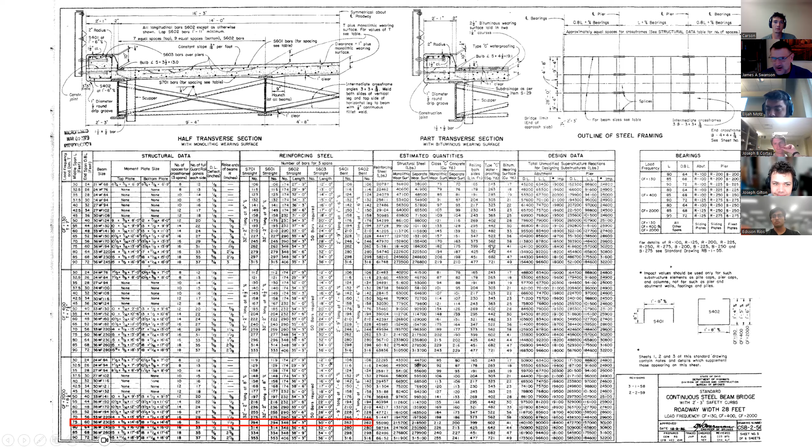So yeah. And probably if I were to name it again now, in order to be PC, I would probably avoid the word, the I word. But I'm going to go ahead and ride that train until it crashes.

So if you look at the upper right part of that drawing, this is a typical structural layout. So each of these bridges has 4 girders. They have 2 intermediate piers. So here's an intermediate pier. I guess I could draw on this. Here's an intermediate pier right here. Here's an intermediate pier right here. This is an abutment, and this is an abutment as well. In this context, we could refer to it as the left abutment and the right abutment.

But typically what you would do is you would stand at the west end of the bridge and look east, or you would stand at the south end of the bridge and look north. And in that case, the abutment that you're standing on is the rear abutment, and the abutment at the opposite end of the bridge would be the forward abutment. Maybe a little bit more bridge knowledge than you really need.

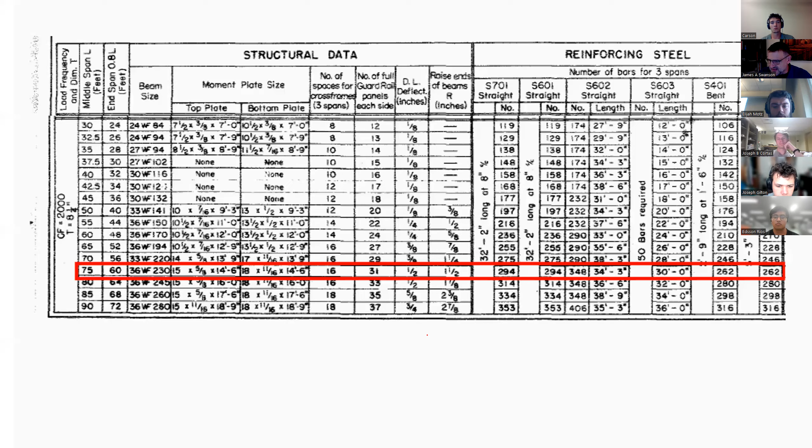If we go and take a look at some of these dimensions, we have span lengths up here that we need to know. We have girder spacings that we need to know. Those are all called out in that table. So if we zoom in there, we're going to have a middle span of 75 feet, 2 end spans of 60 feet. It's going to be a 36 wide flange 230, which is slightly different than a W36x230. That's an old version of the manual. That's not really germane to this conversation. I keep diving in too deep into the details.

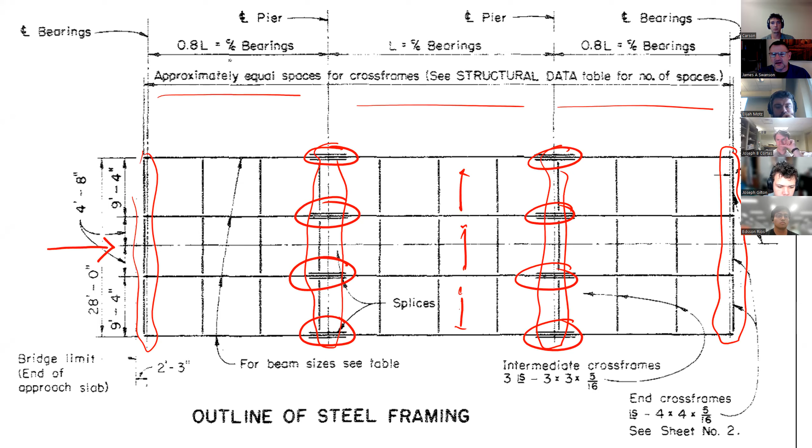One other thing that's noteworthy here is that there are moment plates, and those are reinforcing plates for the girders where the moment is the heaviest. So the moment tends to be heaviest over the piers in the negative moment region. So in order to reinforce the girder, we put in, we call them cover plates nowadays; they called them moment plates back then. And then you see the number of cross frames, et cetera. So this gives us all the details that we would need for our bridge.

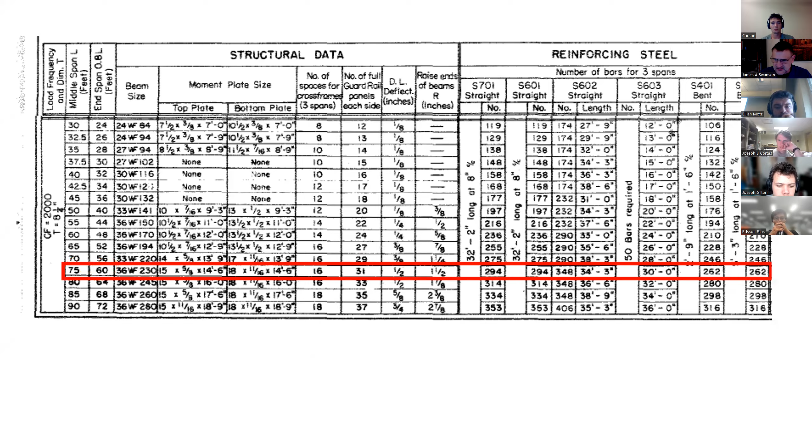So if we look at a cross section, this is a half section. So this is a line of symmetry here. So you can see how this is all spaced out. So what we have is girder 1, girder 2, girder 3 would be over here, then girder 4. And so what we're going to do is we're basically going to model one girder in this bridge, and then we're going to subject the loads for the bridge onto that one girder.

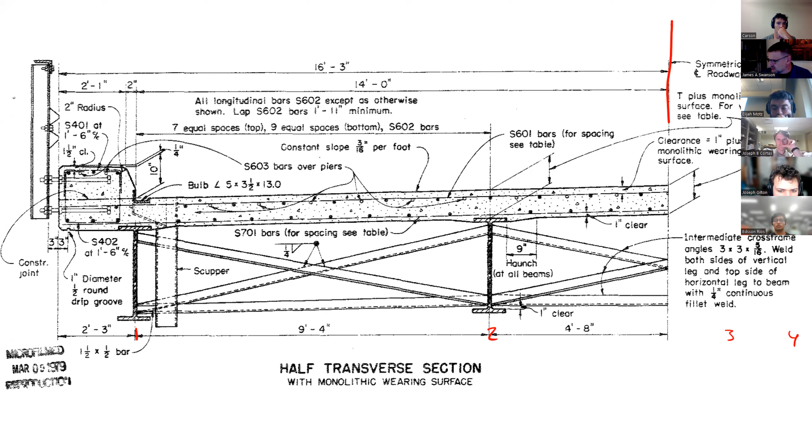Now this drawing here is only a half section of the bridge, and it's really busy with all the callouts and the language. So what I'll do is I'll go here and say, let's use this. I know the guardrails are different, but I had this already drawn to save me some time. So let's use this as an example.

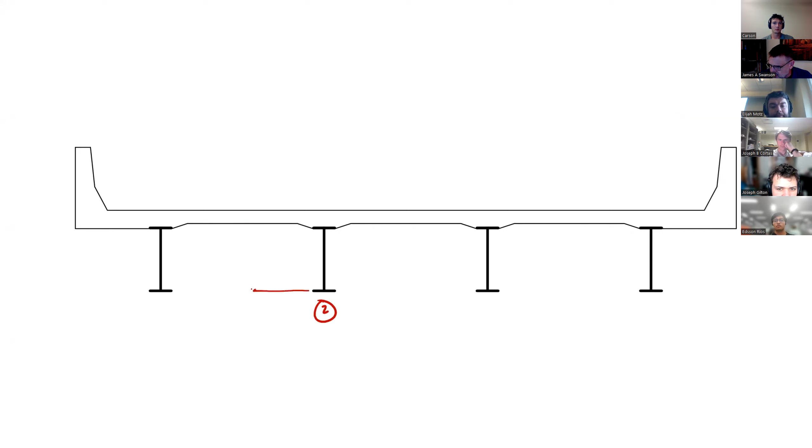So when we put loads on this thing, what we end up doing most of the time is we take a tributary width for all of the gravity loads. So if we're going to model girder number 2, what we would do is take a tributary width that goes halfway to the girder to the left, a tributary width that goes halfway to the girder to the right, and we would include the self-weight of that steel girder plus the self-weight of the concrete that's within that tributary width. That's probably common knowledge to everybody in this room.

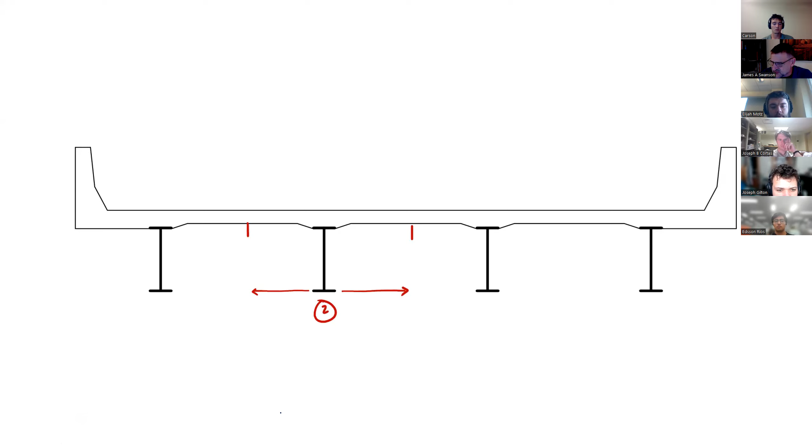What's probably not common is how we apply the lane loads or the truck loads on this bridge. So what we would do in bridge engineering is we would say, all right, all my lanes are 12 feet wide. So the lanes look like that. I might have lane 1 here, a lane 2 here, and a lane 3 here. And then you say, all right, I've got my highway truck. It's an HS20 or an HL93 or whatever truck you're designing for. I'm going to put this truck over here in this lane as close to that girder as I can get it.

I'm going to put this truck over here in this lane as close to that as I can get it. And so what we end up doing is we take a truck load that looks like this with 3 axles. We spin it sideways and we come up with something that's called a distribution factor.

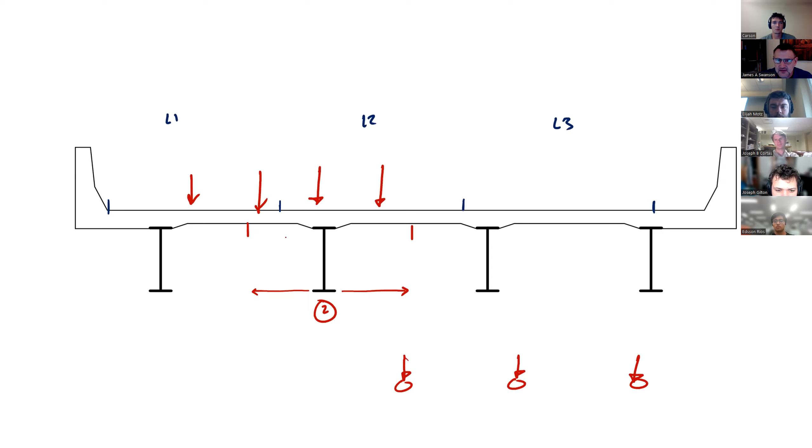And so the distribution factor in the context of bridge engineering is equal to the number of lanes worth of loading that go on a girder. And so I'm showing 2 lanes worth of loading here, loading from lane 1, loading from lane 2, but part of that load is carried by girder 1, part of that load is carried by girder 2, and some of it is carried by girder 3.

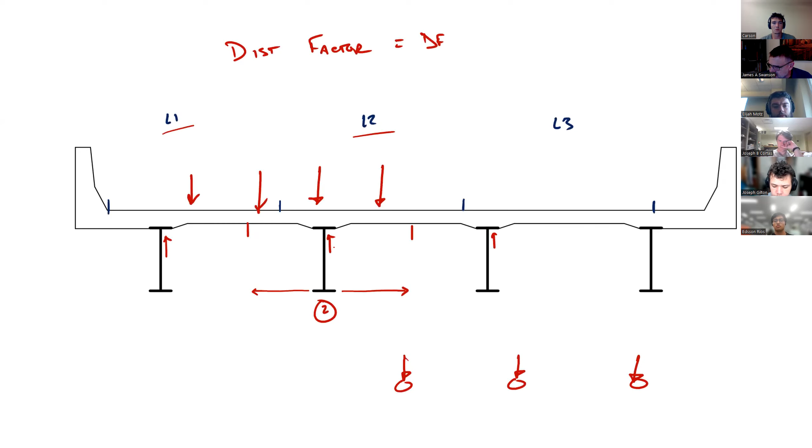So what we can do is go through an analysis, and we might say that the reaction force on the deck due to girder 2 is equal to 80% of 1 lane's worth of loading. And so we use that distribution factor when we apply the live load. So with that being said, let's go ahead and start modeling one of these girders.

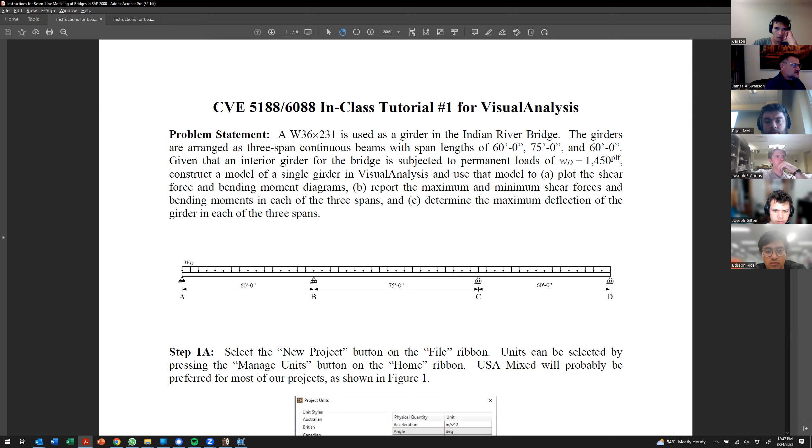Right, so fairly common problem. This particular one doesn't have any live loads in it, but then there's a second one that I'll post when we get there that we'll go back and model some live loads. All right, it occurs to me that I haven't finished the introductory modeling presentation, so I should probably do that. Let me go ahead and launch that, and since I'm working over here, I'll just launch it over here.

That's M1, right? And I'll move that over there, hit F5. Nope, let me hit Shift F5.

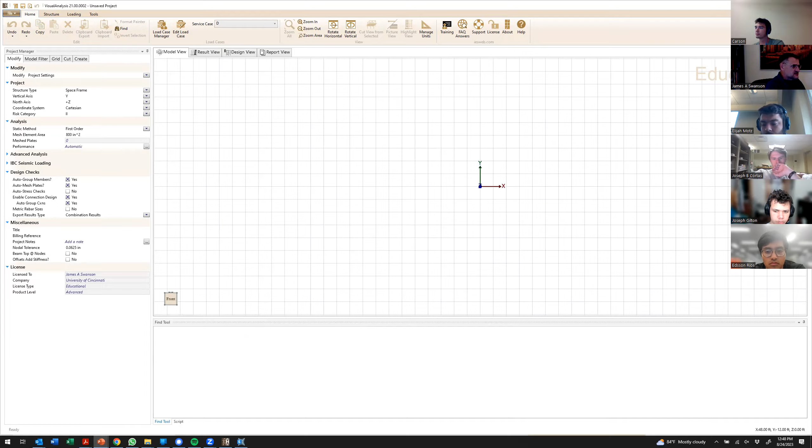But I use this as an example when we start doing the matrix analysis. And as a first problem, it's a big problem. So you get a matrix that is 10 by 10 that you have to invert. And anyways, the basic approach that we use for modeling these structures is that we replace each of the physical members in the structure with a line object or an element, and each of those objects or elements is connected to each other using a node.

Now, the terminology here gets a little bit cumbersome. I'm using the word object, I'm using the word element. In a lot of cases, those two things are synonymous with each other, but in some cases they are not. SAP 2000, for example, distinguishes between an object and an element. The word node, the word joint, those are usually synonymous in all cases.

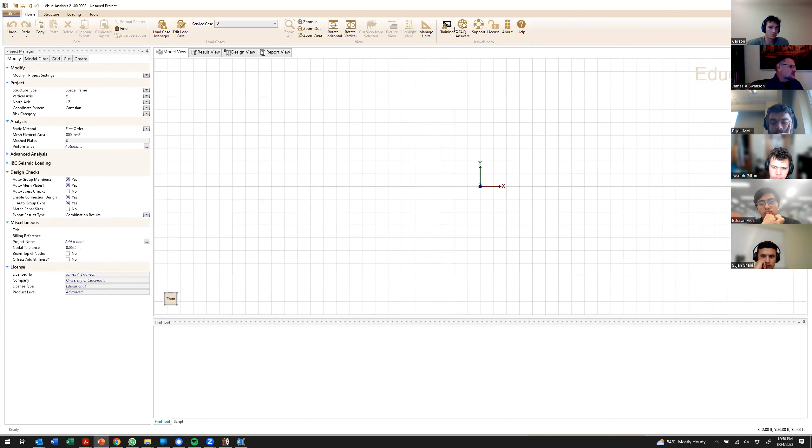So I'm actually going to switch back to the other computer. I want to be able to sketch on this, and in order to do that, I need to be on the other computer. I apologize for the discontinuity here, but I think it'll make it better overall. Let's go back. I want to share that screen. There we go.

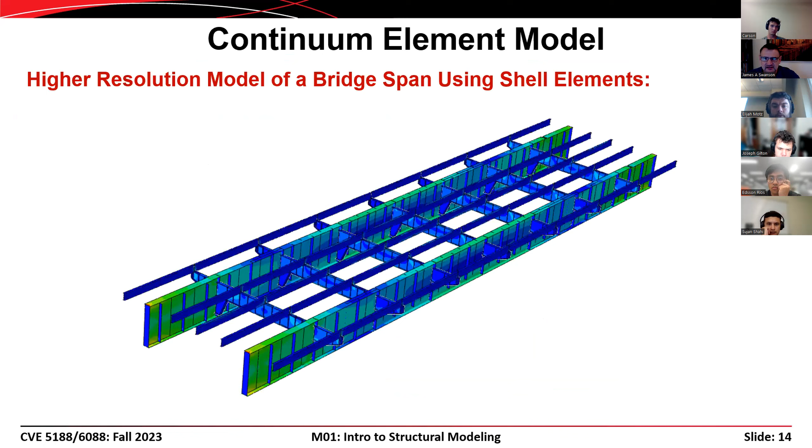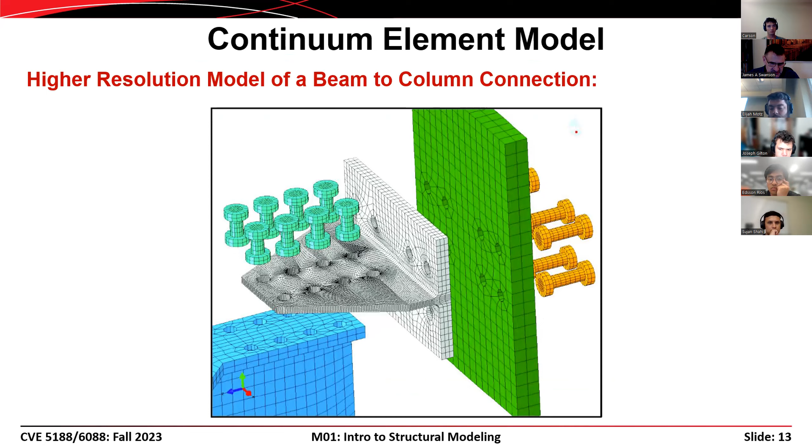If you went to Dr. Rosati and asked him what his distinction was, he'd probably give you something similar, but maybe a little bit different. All right, so here are the rules again. Every node has degrees of freedom that define motion as well. So what is a degree of freedom? Basically, a degree of freedom is an expected motion associated with an object.

And so the motion that we deal with is either a translation, a delta x, a delta y, a delta z, or it's a rotation, a theta x, a theta y, or a theta z. So depending on what type of structure we're modeling, we have different degrees of freedom associated with each of the nodes in our model. So if we were modeling a two-dimensional truss in the xy plane, the degrees of freedom at each node would be displacements in the x direction and in the y direction. We would have a delta x and a delta y at each one of the nodes.

And so since this is probably modeled as a truss, let's go back here and draw in those degrees of freedom. So let me use blue for that.

I don't know why, I just always use blue.

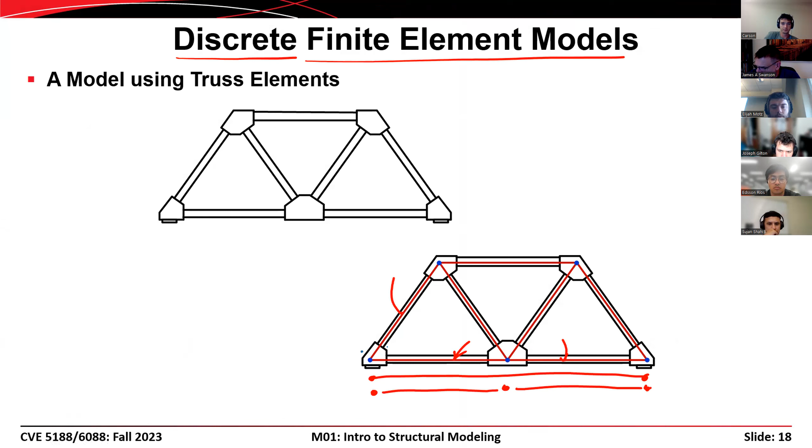So this would be delta x, this would be delta y, so that node would have 2 degrees of freedom. Up here we would have delta x, back here we would have delta y. And so at each of these 5 nodes, we would have 2 degrees of freedom. So we would have a total of 10 degrees of freedom for this small truss. Like that and like that.

Now, we don't worry about rotational degrees of freedom in a truss because the assumption in a truss is that every member is pinned to the node. And so if the member is pinned at the node, then the node isn't going to rotate at all. It's free of rotation. So there's only 2 degrees of freedom, displacement x, displacement y.

All right, now let me go back to the slide at hand. That's actually a touch screen. That'll save me half a second.

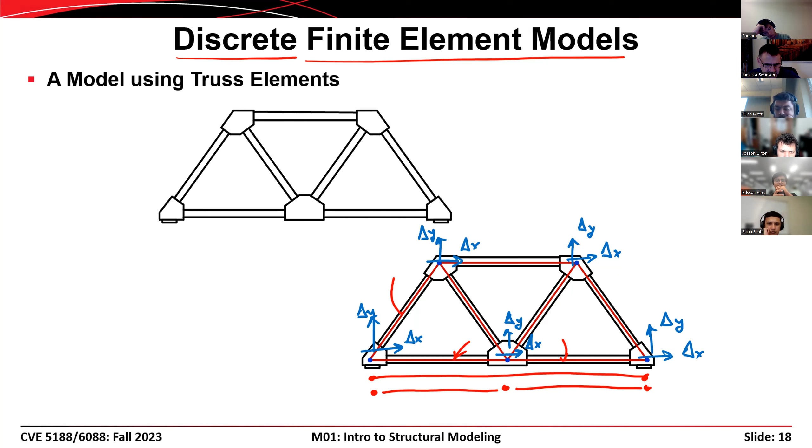There we go. So if we look at a 2D frame in the XY plane, then we retain the two displacements, delta x, delta y, but we also add a rotation about an axis that's parallel to the z-axis. So we have 3 degrees of freedom in every node. We have delta x, delta y, and theta z. If we look at a 3-dimensional truss, then we have 3 displacement degrees of freedom, delta x, delta y, delta z. And if we look at a 3D frame, we have 3 displacements and 3 rotations. We end up with delta x, delta y, delta z, theta x, theta y, and theta z.

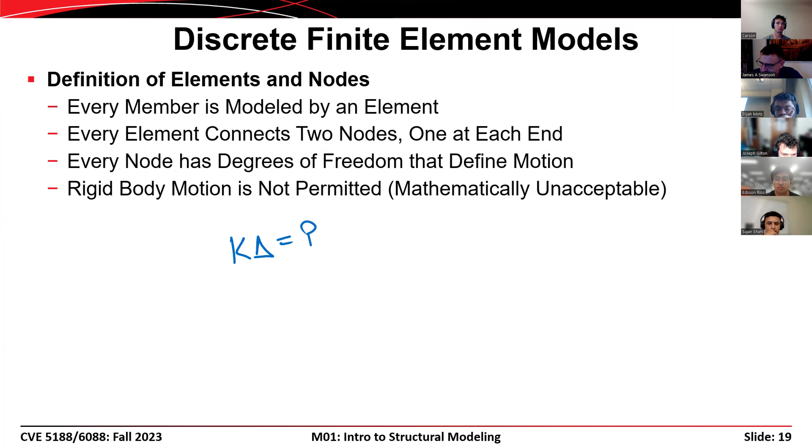So it works out that when we construct a model of a structure like this, we're actually solving a problem that looks like this. We have a stiffness matrix multiplied by a displacement matrix that is equal to the loads. It's like a spring problem in physics, right? You have a spring stiffness K, you have some displacement, and then you have the resulting force in the spring. Except in this case, it's presented in a matrix format instead. So you have a matrix K, you have a vector of displacements, and you have a vector of loads like that.

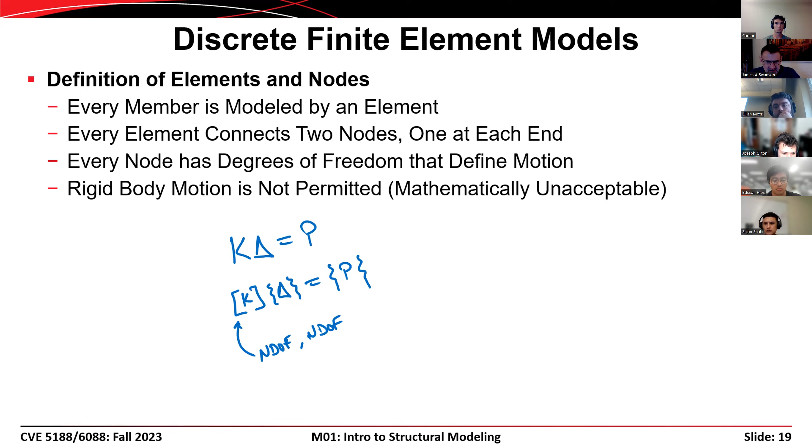And so the size of that matrix K is the number of degrees of freedom by the number of degrees of freedom. So if you take that truss with 5 nodes, each node has 2 degrees of freedom, you end up with a stiffness matrix that's 10 by 10. It has 100 elements in it. Some of those elements are going to be 0. In fact, a lot of the elements are going to be 0, but it's still a 10 by 10 matrix. So you can see that when we present a small problem, it gets rather large mathematically rather quickly. Anyways, so that's in the context of a 2D truss, a 2D frame, a 3D truss, and a 3D frame.

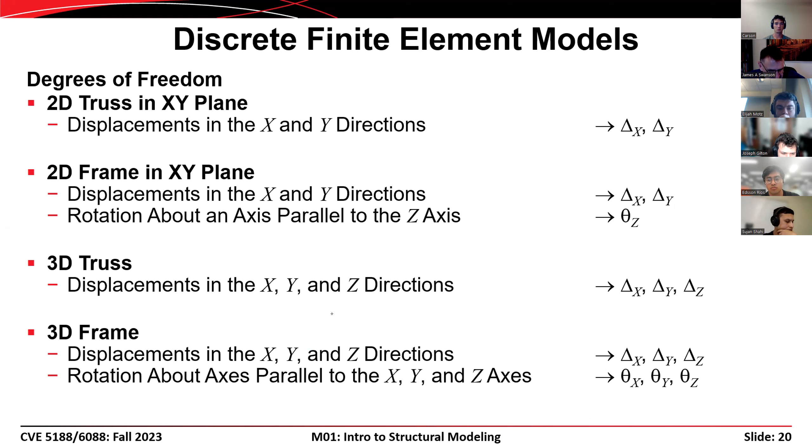So one of the things that is interesting, let's see, I want to see where I'm at here. So when we look at those degrees of freedom, we're going to be looking at, say, for a 2-dimensional frame, I typically draw the nodes as boxes when it's a frame. And the reason why, so if we have a truss, I'll draw the node as a circle like that.

If I have, let me make that a little bit bigger, I guess, since you guys might be, is anybody actually working on their phone? Probably not. So then there's a box.

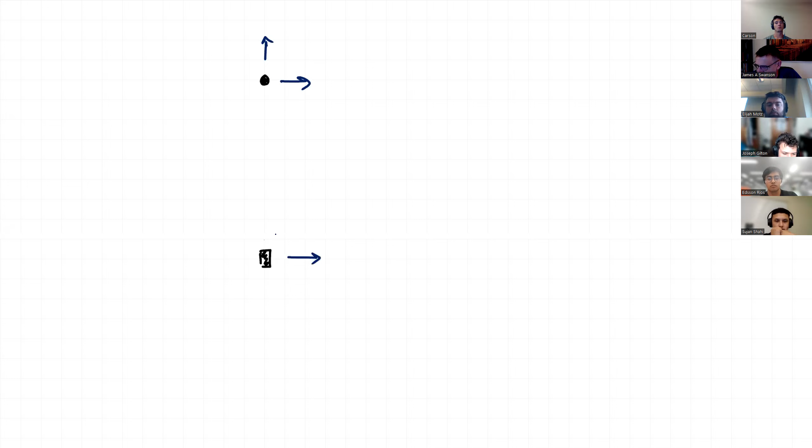If it's a truss, I usually draw the node as a circle. If it's a frame, I draw the node as a box. And the reason why is that when we go in and look at the truss, we're only looking at displacements in 2 directions. When we're looking at the frame, we're looking at a rotation as well.

And that box is meant to imply that there is a rotational degree of freedom there, because you can see a box when it spins, but if it's a dot, you can't tell when it spins because it has no corners, right? So in this case, we would have a delta x, we would have a delta y, and a theta z. I call it theta z. It's theta about an axis parallel to the z-axis, right?

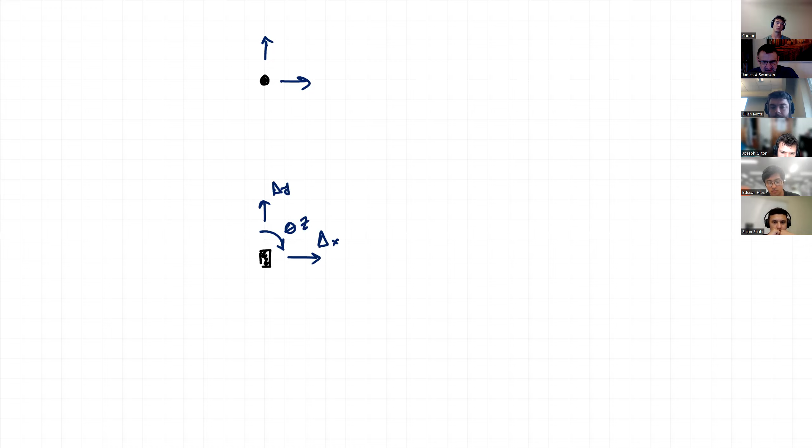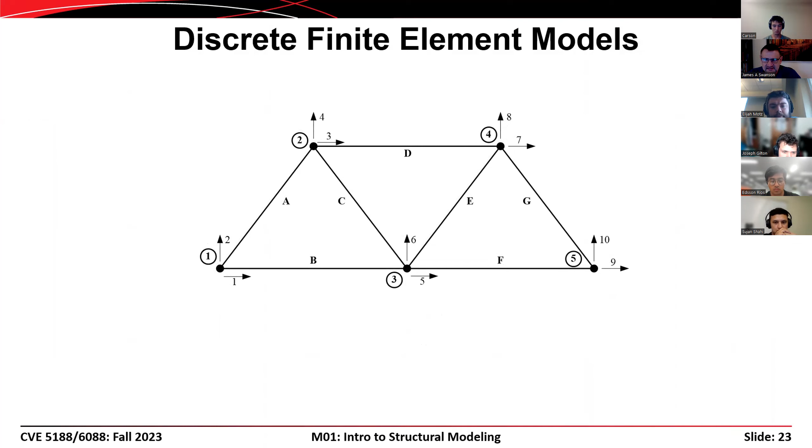And the numbering sequence that I use is rather anal retentive, but it makes a lot of sense, especially if you're one of the few people on Earth that likes to write code. Then this will make a lot of sense to you. So we have the ith node number, and we could define the degree of freedom based on the node number. So if we go in here, for example, and we look at node number 2, we could say that delta x at node number 2, that degree of freedom is equal to 2 times the node number 2 minus 1, so that's equal to the 3rd degree of freedom.

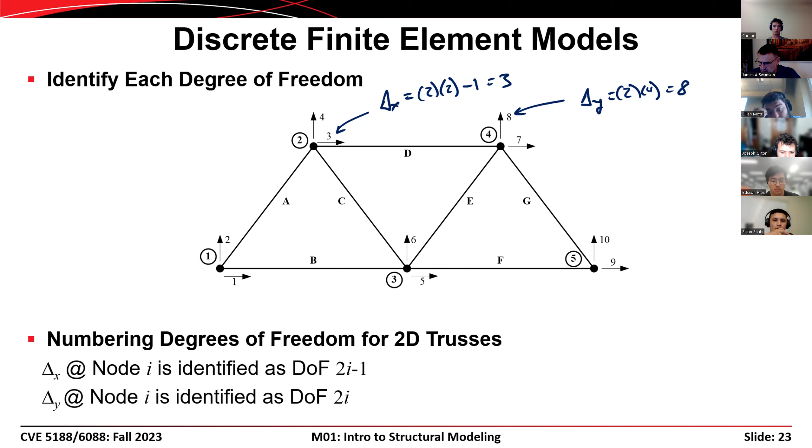If we go in and look at delta y at node number 4, for example, then delta y has a degree of freedom of 2 times the node number, that's 4, and then that's equal to 8. So that's the 8th degree of freedom. So you could go through here and you could say any degree of freedom that has an odd number is going to be a displacement in the x direction. Any degree of freedom that is an even number is going to be a displacement in the y direction.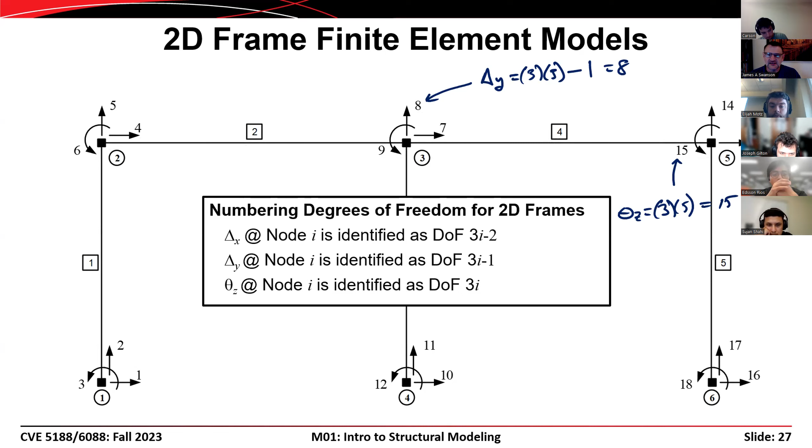So one of the first homework problems is for you to go into a truss and identify the degrees of freedom, and then calculate some of the connectivity of the members in that truss, and then calculate some directional cosines. And it might not be obvious now why we're doing that, but kind of like Mr. Miyagi telling Daniel-san to go wax the car, eventually you'll see the utility of calculating directional cosines and connectivity.

Now, one thing that bears mentioning at this point is that when we go into Visual Analysis and SAP 2000, the coordinate systems that they use as a default are different from each other. Visual Analysis assumes that the XZ plane is the plane of the Earth, and the Y axis is vertical. So the Y axis is the gravity axis. So when it applies gravity loads by default, they're applied in the negative Y direction.

SAP 2000 makes a different assumption. It assumes that the XY plane is in the plane of the Earth, and that the Z axis is perpendicular to that. So when it applies gravity loads, those gravity loads are in the negative Z direction.

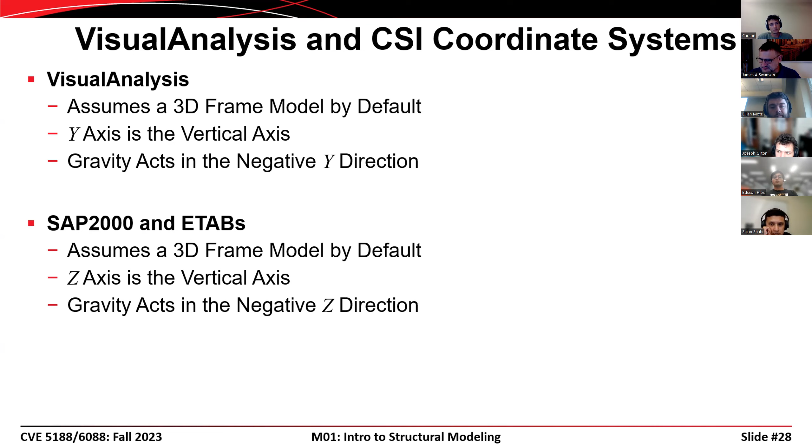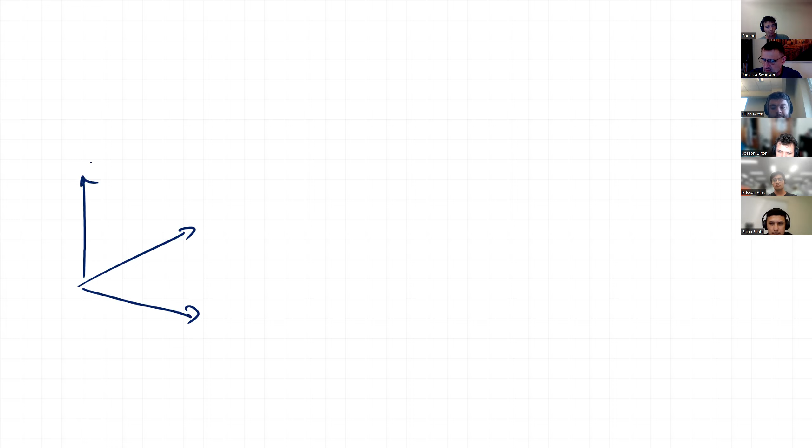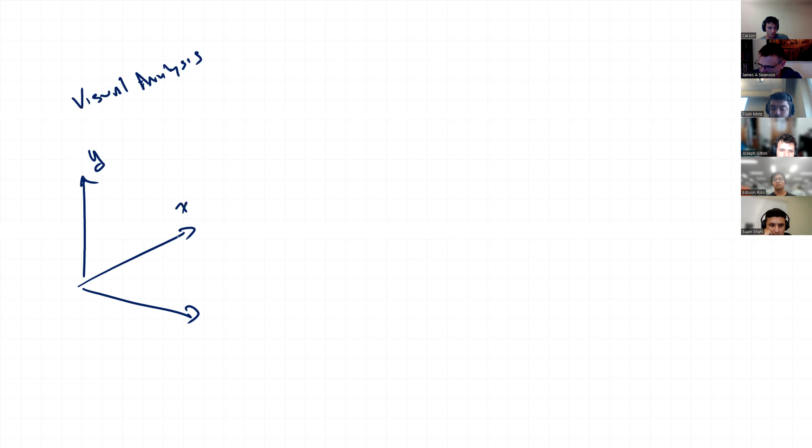So if we come over here and do a little bit of sketching, that would make this a sketchy chart. This is going to be the Y-axis for Visual Analysis, like this. And so if that's the Y-axis, then this is the X-axis, and that's the Z-axis, and that gives us a right-hand coordinate system. So when we do the same thing for SAP 2000, we have the X-axis defined here, the Y-axis defined there, and the Z-axis defined there.

So when we go in and apply a gravity load, that gravity load is applied in the negative Y direction for Visual Analysis, and it's applied in the negative Z direction for SAP 2000.

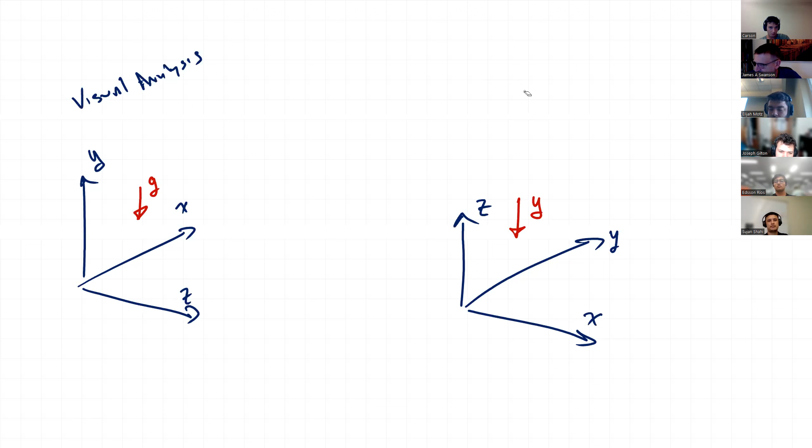Whoops, that's the wrong shade of blue. That's unacceptable. There, and that's much better.

Okay. And so when we do a two-dimensional model within the three-dimensional space, a lot of times we'll work in the XZ plane for SAP 2000, and by default we're going to work in the XY plane for Visual Analysis. And so that's a little clunky. It creates a lot of confusion. So by calling it out here, you know what to expect. Now that you know what to expect, hopefully you guys will all make fewer mistakes. You're going to make mistakes. I still screw that up from time to time.

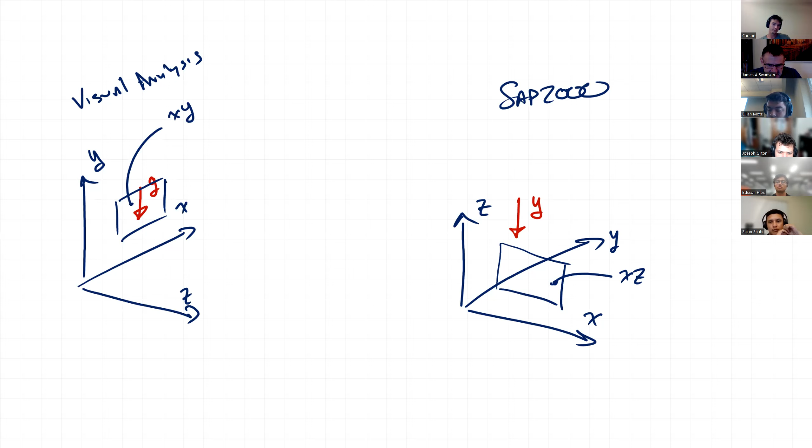All right, so the next topic on this presentation is the distinction between restraints, constraints, and releases. These are three different things that occur in models with regularity. And these terms are very specific and very important. There's a lot of things that I say that mean the same thing, like a node and a joint, those are kind of the same thing. For a lot of cases, an object and an element are the same thing.

But if you say restraint and you mean release, that means two very different things. If you say constraint and you mean restraint, that means two very different things. So I want to define them up front, and then I'll reinforce that as we go through the course. So a joint restraint creates a relationship between some degree of freedom and an absolute reference frame. Now that sounds very analytical, but let me illustrate that by going back here. So if we look at the nodes at the bottom of this, these are going to be nodes that have restraints.

So if we come in here and look at nodes 1, 4, and 6, and we look at the degrees of freedom, that means that node number 1, degree of freedom number 1 is going to be restrained, degree of freedom number 2 is going to be restrained, and degree of freedom number 3 is going to be restrained. Over here, degree of freedom 10, degree of freedom 11, those are both restrained, but degree of freedom 12 is not. At the right, degree of freedom 16, 17, and 18 are all restrained.

Now, when I use the mathematical definition and say it's a relationship between a degree of freedom and an absolute reference frame, that absolute reference frame is that those degrees of freedom are equal to 0, right? We're saying that that node is fixed. It's not going to move. So we know delta x at node number 1 is equal to 0. Thus, delta 1 is equal to 0, delta 2 is equal to 0, theta 3 is equal to 0. So it's very specific. It creates a relationship between the node and an absolute something, all right? Okay, let's go back to that definition.

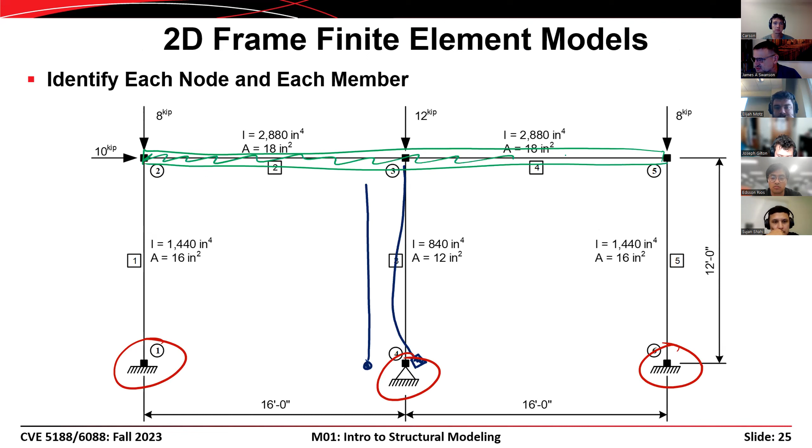Go here. And so one of the common things that we would do in our models is we would come in and say that, boy, I wish I had gray. I don't have gray. I'll use green. There's probably a floor slab up here on this level, or maybe it's a roof slab. So we would probably model that as a rigid diaphragm. And what that means is that if it's concrete, it's so stiff that when this thing moves left and right, all three of these nodes are going to move by the same amount to the left and to the right.

It's a diaphragm action. Not everybody knows what that means, but what we would do in our model, if we want to capture that, is we would say, let's go ahead and put a diaphragm constraint into this. Diaphragm, it's got a goofy spelling, and that would be a constraint. So what we would do is come in and say, all right, I want the displacement in the x direction at that node to be equal to the x displacement at that node and equal to the x displacement at that node.

And if we go to the next slide, then what that would say is that delta 4 is going to be equal to delta 7, and that's going to be equal to delta 13. And that is a constraint. So what we're doing is we're defining relationships between degrees of freedom at different nodes. Okay. There are other constraints. That's a rather advanced topic, especially when you go to implement it in the matrix operations. It's very useful in building type structures. It's useful in bridges too. It makes the problem smaller. It makes it quicker to solve. It also gives us results that are more typical of what we would expect from a hand analysis. And so it's very useful

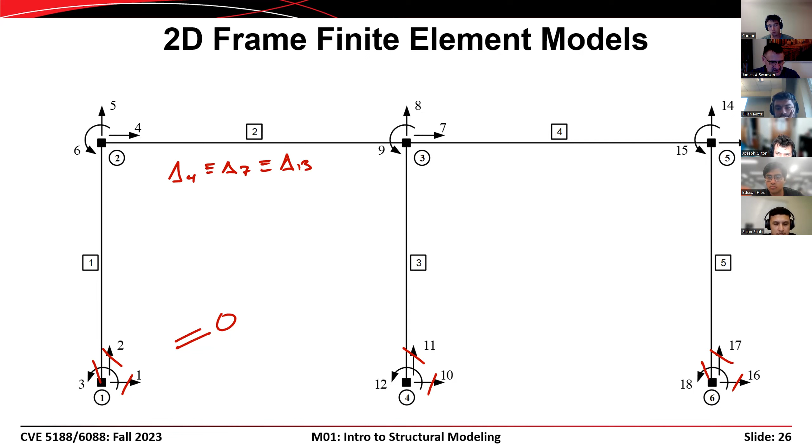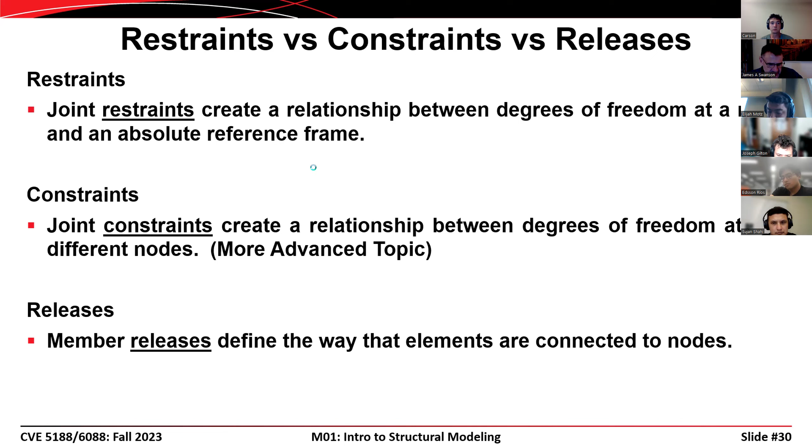So, right. Then the last thing that we'll talk about is a release. A member release is something that's added to define the way an element is connected to a node. And so when we go back to this, for example, maybe we would want to have one of these beams pinned at its end instead of connected rigidly. So in that case, you would come in with the purple marker and put a pin in there. And that pin, the word that we use to describe that is a release.

We're releasing the connectivity between the moment at the right end of that member and the node that it's attached to. Or we would be releasing the moment connectivity between the top end of that column and the element that it's connected to as well. And so those three terms are important. We use them a lot, but we have to be careful when we use them, because if you say the wrong thing, then you get the wrong answer from your professor, and then nobody's happy, right?

I've wasted my time describing the answer to the wrong question, and you're back to square one.

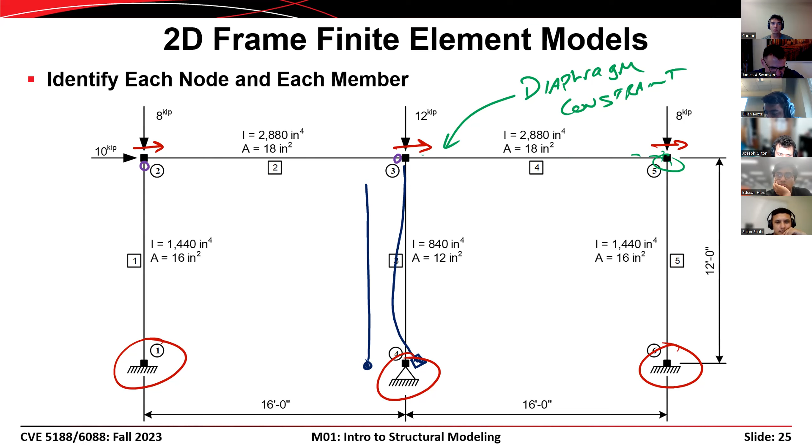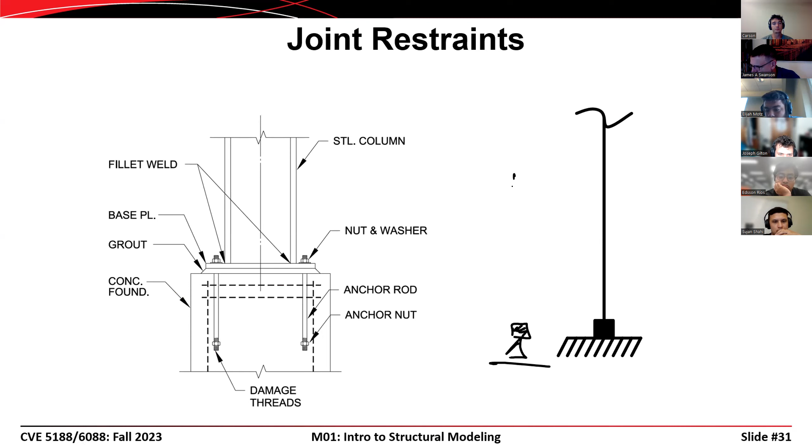All right, so let's talk about joint restraints. So this is an example of a joint restraint. We have a column coming into a footer. In this case, you might model that as a fixed support. I don't know, it depends on the thickness of the base plate and how it's all called out. You might actually model that as a pin support instead, and then you would model it like this. Even though there is still a rotational degree of freedom there, that would be a pin support instead of a fixed support. This guy isn't so ambiguous though.

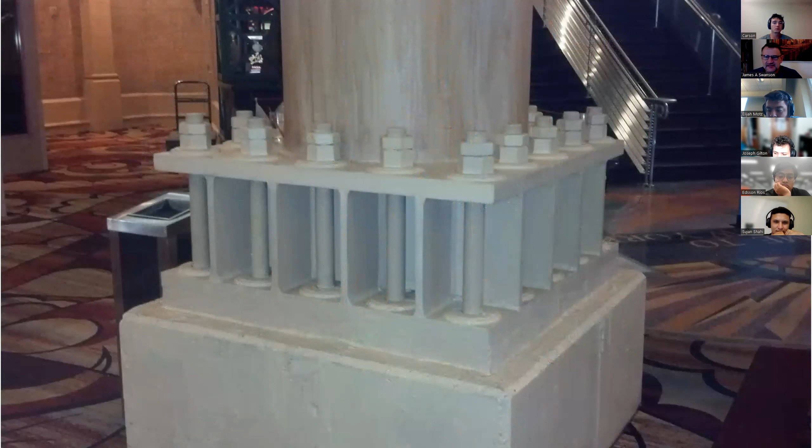If we're modeling this, then we have a member coming down, we have a node there, and that node is probably going to be considered to be fixed. With 4 anchor rods on each side and all of that reinforcement, I don't think anybody would model that as a pinned column support. And then just to eliminate any doubt whatsoever, this is something that would certainly be modeled as a fixed support. This just is begging to be modeled as a 3-dimensional structure.

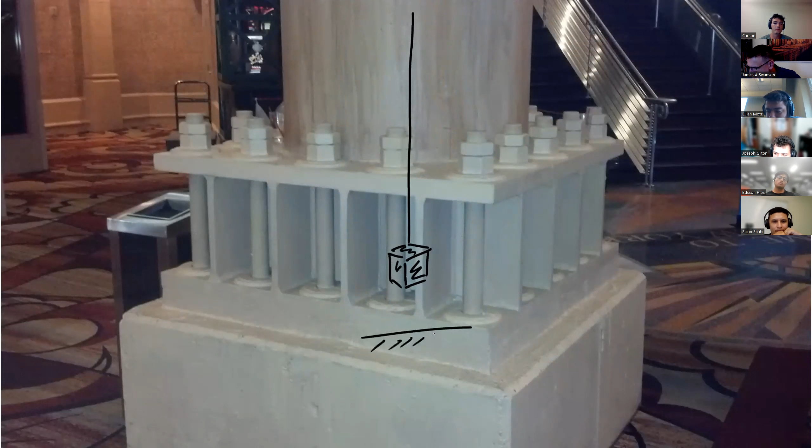So let me draw a cube at the bottom instead, and in this case here, you would have 6 degrees of freedom. We could sketch that in, and that is rather crude, but everybody kind of understands what that means. So we would end up with a displacement delta in that direction, a displacement delta in that direction, a displacement in that direction as well. And then we would also have a vector that looks like that. It's double-headed, which implies rotation, or we could put the rotation on it like that.

We could have our rotation vector like that, or like that. I don't know why that erased. And then we can have our displacement vector like that. So right hand, and there we get that. So that would be theta, that would be theta. I've got this backwards.

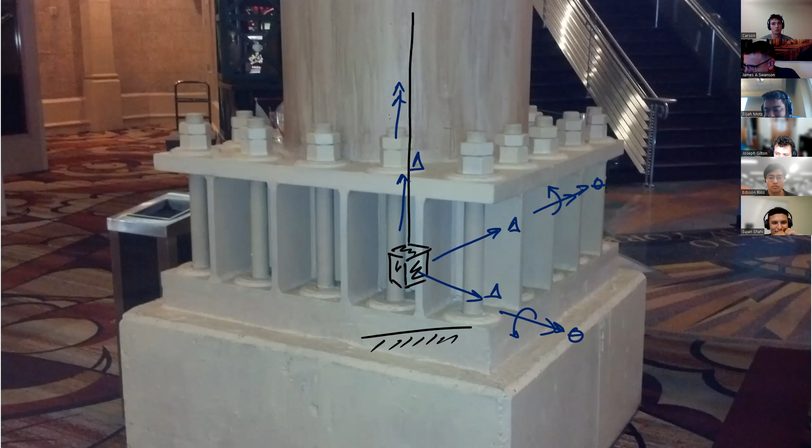My freshman year, I took an entire physics exam using the left-hand rule. Yeah, that happens, right? We all make dumb mistakes. Some of us make more than others. I've come to believe that wisdom is simply the act of making lots of mistakes and learning from them. And so I'm no smarter than anybody else. I've just done everything wrong already. You guys haven't had the chance to screw enough things up yet. When you get older and you make more mistakes, then yeah, Joe's checking me on that, right?

So here's my, I've got this other one backwards. That's why, Joe. Yeah, that one should be the other one. Yep. So when I see you studying like that, I start to doubt myself.

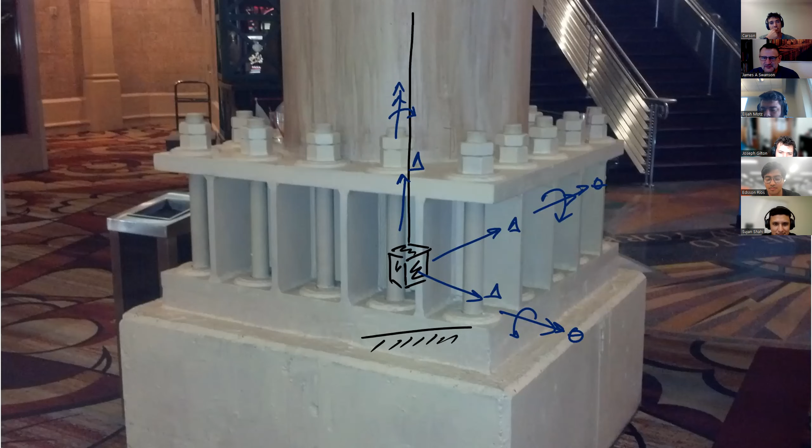All right. So anybody know where this base plate is by chance? Some of you may have been in that building. This is in the casino at New York New York Resort in Las Vegas. The resort has a roller coaster that runs around on the top of the building, and so it has these big roller coaster type columns that come down through the structure. This is one of those that's in an unfortunate place in the lobby, and everybody has to walk around this in order to get to the escalator, to the steps. Occasionally somebody recognizes that, but not very often.

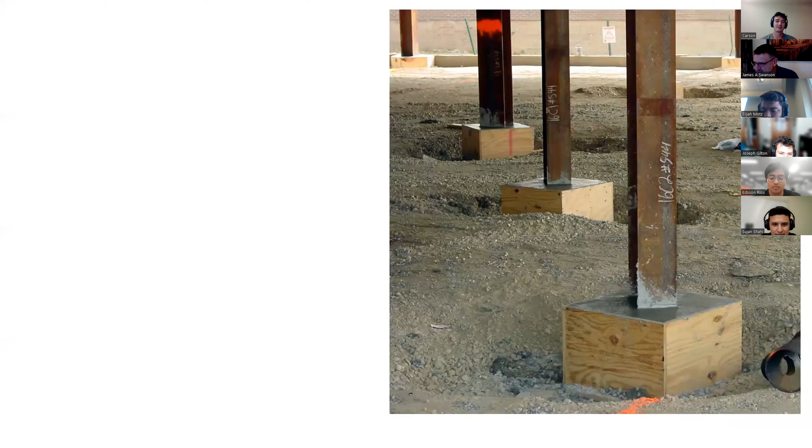Okay, here's some more columns. This is actually at Mercy Hospital in Fairfield.

Funny story, child A was being born. Wife went into labor one afternoon. We went to the hospital. Turns out that giving birth takes a long time. So I got hungry.

I went out for Chinese food and I rented some videos. The maternity ward was nice. They had like a TV, and in that case, it was like a VHS player, right? Because that was 2002. And so when I was out there, they were pouring these footers around.

So I took some pictures of the columns when my wife was up in the hospital in labor. And so she's not my wife anymore. I'm not sure what happened, but I've got a different wife now. I'm not sure if this one episode contributed or not, but right.

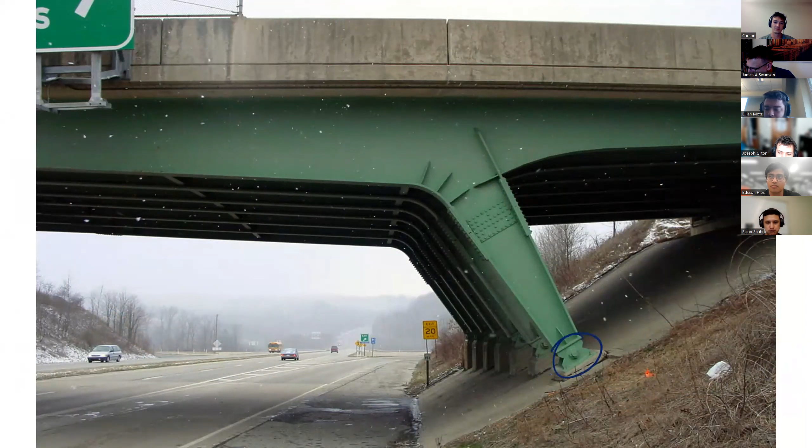So in this case, these are rather light base plates. So I would probably model these as pin supports. Here's a bridge outside of Pittsburgh, Pennsylvania. And I stopped and took pictures of this one snowy day because here you can see these supports at the bottom. It's an inclined column with a pin support.

And one of the things that I love about bridges is that they're not shy about hiding the structure, right? So they keep everything out where you can see it. And so you can see this is a true pin. And if we were to model this in 3 dimensions, this would be...

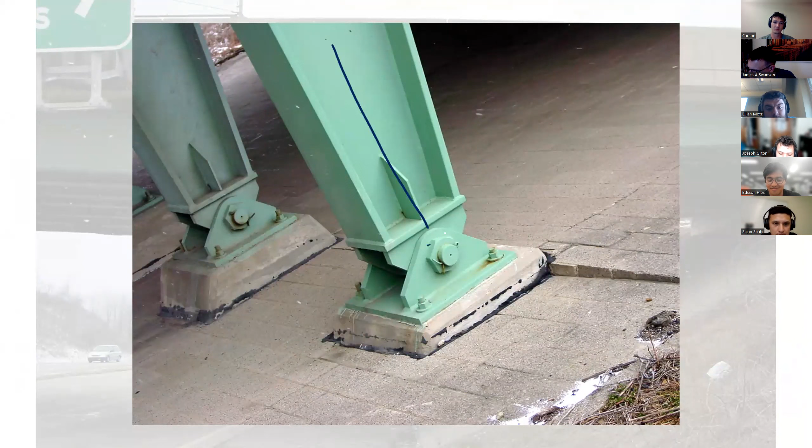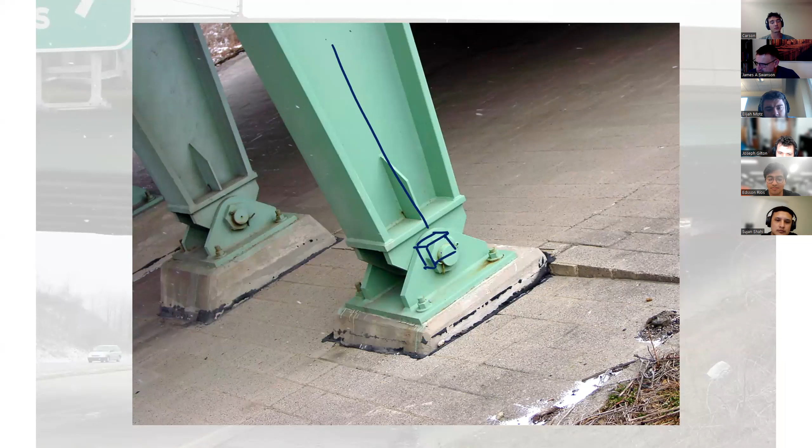This would be an interesting case because now you have a situation where you have 2 degrees of freedom rotationally that are restrained, but the 3rd degree of freedom is free. So you would have a degree of freedom coming out this way that is unrestrained, but you'd have a degree of freedom there that is restrained, and then you would have another degree of freedom that way that is restrained as well, rotationally speaking. So that's kind of interesting.

So here's a bit of a discussion about member end releases. And so we'll go back to the building context in this case. And so we have 3 cases here. We have the case on the left where we have full restraint. If we're going to put our steel design hats on, that would be referred to as a fully restrained connection.

And basically what we're doing is we're welding the shit out of the beam. We're going to go in and weld the flanges of the beam to the column. We're going to weld the web of the beam to the column. And the idea is that if the end of the beam rotates, then the column has to rotate by the same amount. The middle case is a simple connection.

And typically what we would do is take this shear tab or single plate shear connection, and we would model that analytically as a pin. Yes, there's some moment that could be transmitted there. You're going to get maybe a little bit of a couple between this top bolt and this bottom bolt. But generally speaking, there's going to be a lot of rotation at the end of the beam relative to the face of the column. So we would model that as a simple connection with a major moment released.

And then there's the case on the right where you have some transmission of moment. That would be a partially restrained connection. So when we go in and model these in our computer, we would model them like this. The first case where we have a fully restrained connection, we just have full connectivity. Well, I just drew a circle and that's not right. We have full connectivity between all of the elements that are framing in here.

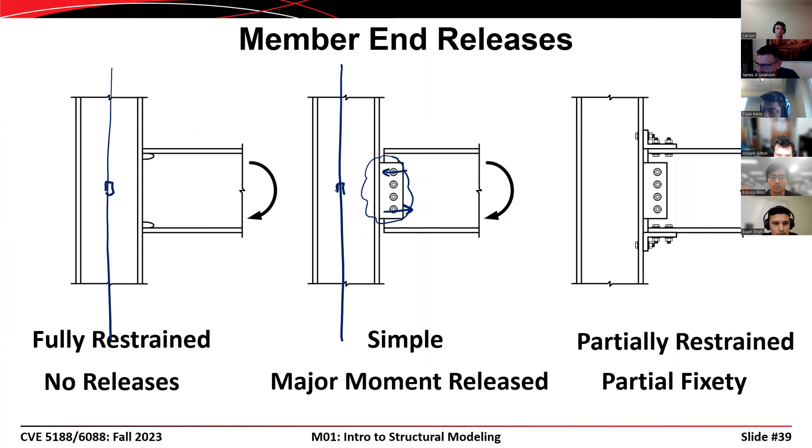One other thing to note is that even though this might be one physical member that's passing through here, we break it at that location and model it as 2 analytical objects, right? And so when we have a beam that's simply connected to the column, we have to put a release in there to tell the program that there is no moment transferred between the end of that member and that node.

Now, that's a good difference between a truss node that doesn't have a rotational degree of freedom and a frame node that does with a release, because here we want connectivity between these members that represent the column, but we don't want that rotational connectivity between the beam and the column. So that goes a little bit further perhaps to answering your question, Joe.

And then over here on the right, what we would do is come in and define some rotational spring stiffness. Maybe that would be something like there is a moment of 400 kip inches per radian that is developed.

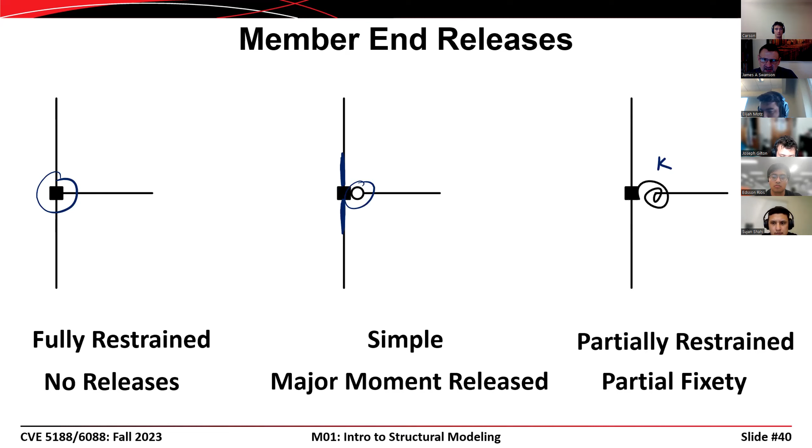And so that would be a spring stiffness, but the units are a little bit awkward because it's a rotational spring instead of a translational spring. All right, and then so examples there.

Okay, I should also mention that each one of these beams has a major axis and a minor axis moment, and we can release one and not the other. We can release the other and not the one, or we can release both of them. And when we go through and look at SAP 2000, each end of the beam has 6 degrees of freedom. There is axial force, shear in one direction, shear in the other direction.

There is torsion, there is moment in one direction, moment in the other direction. So there's 6 degrees of freedom, 6 end actions at every end of it. And we can release any one of those 6 end actions at either end of the member. So a total of 12 releases that are associated with each member if we do a 3-dimensional model.

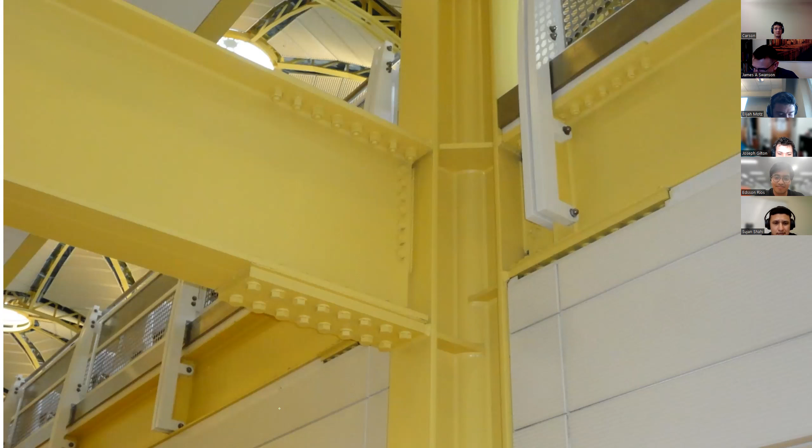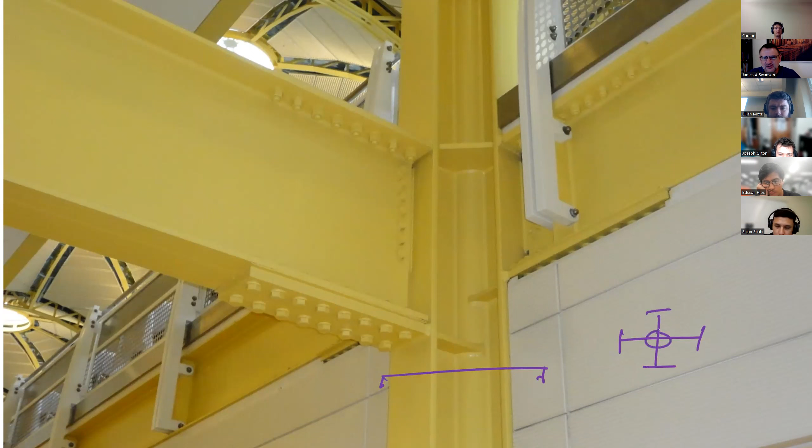Anyways, this is a pretty cool structure. Green won't work in this case. Let me go to purple. So if we take a section here, this is actually a flange cruciform column. So in section, it looks like that, and then it has a pipe in the middle. So it's a member that's a pain to build up, but it works really great because it has similar stiffnesses for flexure about both axes.

And then so we're framing in from one direction with this beam that's continuous across there. And then we have this beam coming in from this direction as well. So this would be one great big node, and there's no releases whatsoever there.

This is a parking garage in Philadelphia. No, it's in Boston. I took my kids to Boston for a conference, and we did the Tea Party cruise and all that other stuff. And then they're like, Daddy, why are you taking pictures of the parking garage? Like, because I'm an engineer. That's what engineers do. My wife also asked me that same question, by the way.

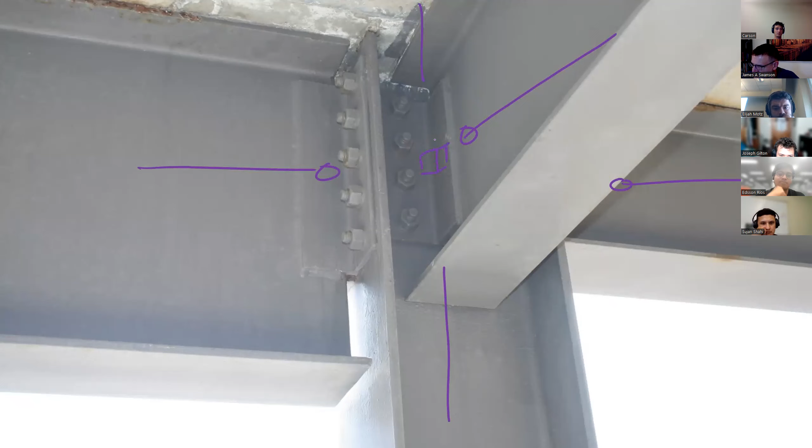And so here's a case where we would have a moment release for that member there. This is going to give us a moment release for that member there. There's going to be a member framing in from the right, and assuming that it's also connected with just a web angle, it's going to have a release there as well. And so when we come in with the column, the only real connectivity here is with the member that's framing continuously through there with that column.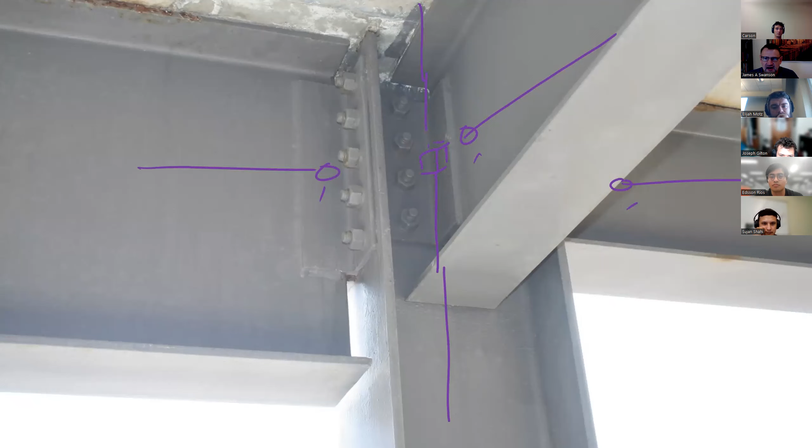Okay, so we have 1, 2, 3 releases for strong axis moment. If we're going to dot our I's and cross our T's, we'd probably release torsion there as well, and maybe even weak axis moment. Okay, here's some other examples.

And what's interesting here is you can look at these intermediate filler beams, and these intermediate filler beams would be released there as well. So you have one beam connected to another beam, but there's a moment release between the joist and the girder in that case. And so these particular pins tend to look like this when we draw a schematic.

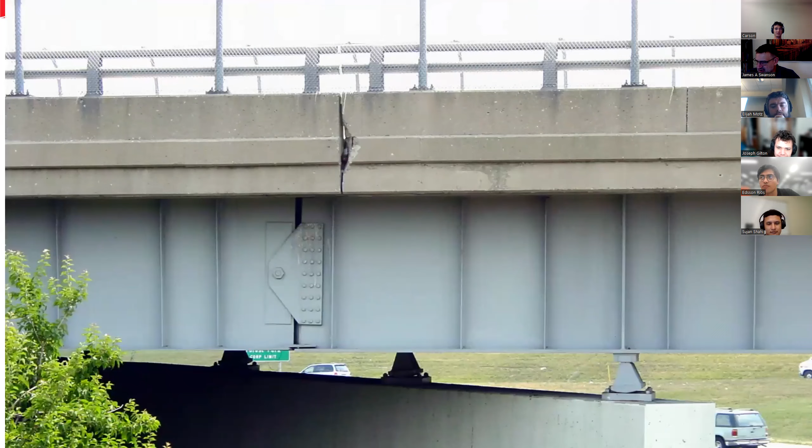So here's a beam or a girder with a pin in it. We think that this is purely a means of imposing sadistic pleasure on students in structural analysis, but it's not. It has a real application. This is a bridge over 275. This is Hamilton Avenue over 275. When I leave home and go to campus, this is one of a couple of ways I could go. And so this particular bridge has a pin in it.

And if we want to model this bridge the way that we think it's going to behave, we would put a pin in our model. That begs the question, why would we put a pin in the bridge like that? And the answer to that question is that before computers, BC, doing the analysis was cumbersome. And if it were an indeterminate structure, it's even more cumbersome.

So you remember that conversation from your undergraduate analysis class where you calculate the number of degrees of freedom or the number of degrees of redundancy in the structure or whatever. And anyways, if you can add a couple of pins to a bridge, it takes a bridge that would otherwise be indeterminate and makes it determinate. So then you can do the analysis by hand and get results that should be quote unquote exact.

Right. It's one of those words I hate to use, the word exact, the word accurate. Those are all words that I hate to use, but occasionally you have to. So that's why we have pins. And since we have those pins, it's important to know how to model them.

So if we were going to create an analytical model of that girder, it might look like this, right? It's probably one physical member going from point B to point E, but we have to break it up into two analytical objects because we have to have a node there at the restraint. We have another analytical object over here, and then at this node, what we're going to do is we are going to release the left end of member BC, and that provides a moment release between member AB and member BC. That's not the only way of doing it.

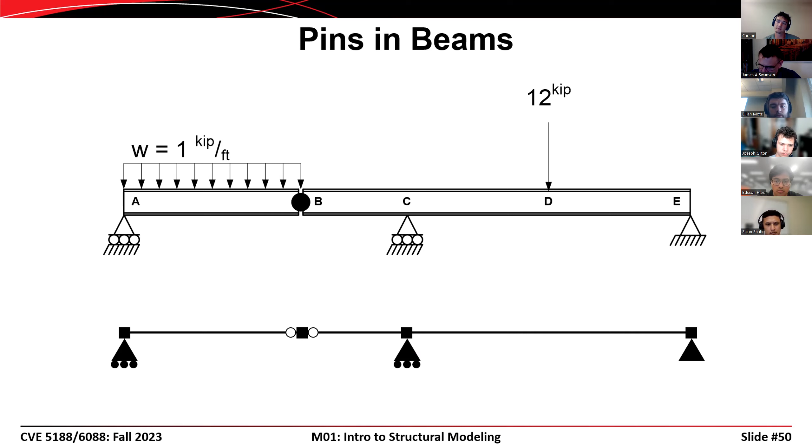It doesn't really matter. What you can't do, what will not work, is putting a release on both sides of the node. If you put a release at the right end of the first member and the left end of the second member, then what you're saying is that there is no moment connectivity to that joint at all, and that joint is free to spin in your analytical model. And that is a rigid body motion. And that rigid body motion results in a singularity in the solution of the problem.

So we go back to this case where we had the matrix ops K times delta is equal to the loads P. If you put a pin on both sides of that node, and if that node is free to rotate without any stiffness attached to it, then the stiffness matrix becomes singular. It has a zero determinant, and that is linear algebra speak for thou shalt not go there, right? So that represents a structural instability.

Now, I'm pointing with my finger, looking at this guy down here and looking at this guy up there, it looks the same to us. If you were to show it from one engineer to another, they would certainly know what you mean. But when you translate it into analytical linear algebra, it makes a big difference. So you can either put the release to the left of the node or to the right of the node, but you can't put it in both places.

If there were another member framing in, maybe there was a column in here in a building, then it would be okay, because then that node would be connected to that column member, and the column would keep the node from spinning. But there isn't a column there because this is a bridge application instead.

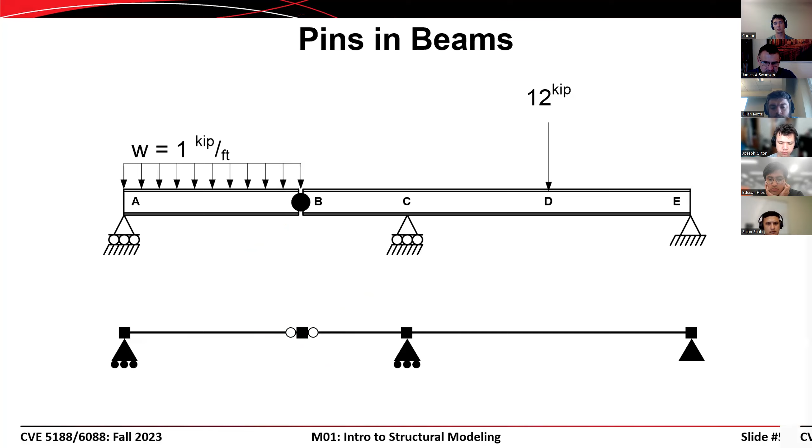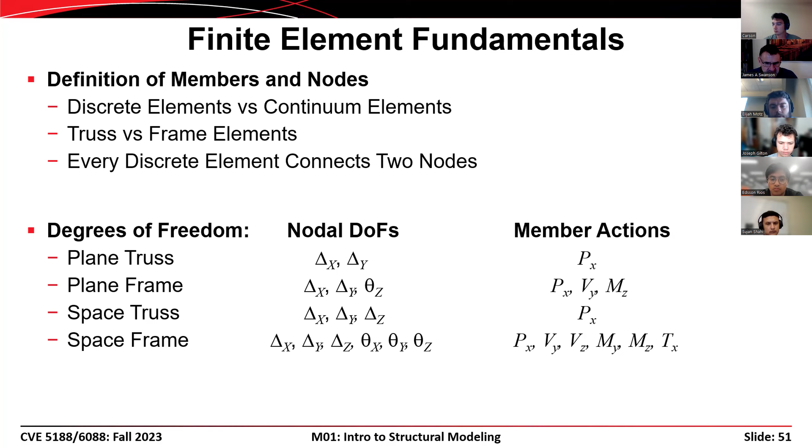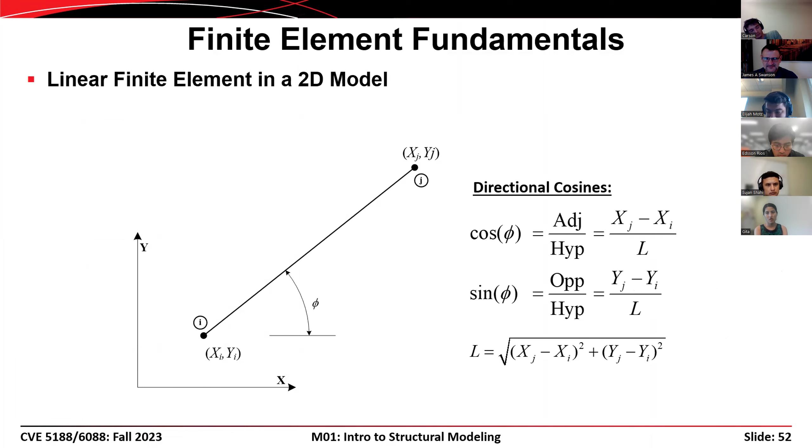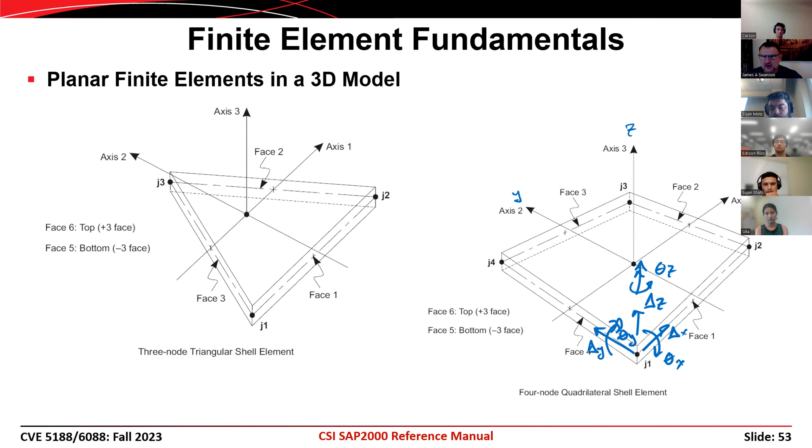Sometimes you have 6 degrees of freedom in every node. Sometimes you only have 5, because that theta Z is called a drilling degree of freedom because it symbolizes a drill bit going through the slab. And that drilling degree of freedom isn't all that useful. So some formulations include it, some formulations leave it out.

And then the last object is a true 3-dimensional quadrilateral. And in this case, we often don't have rotational degrees of freedom. In this case, we usually just end up with 3 translational degrees of freedom. And if you want to account for the case where you have some rotation, then that's usually accommodated with 2 different translations acting over a distance. So if you have a displacement in those 2 different nodes, then relatively speaking, that represents a rotation between those nodes.

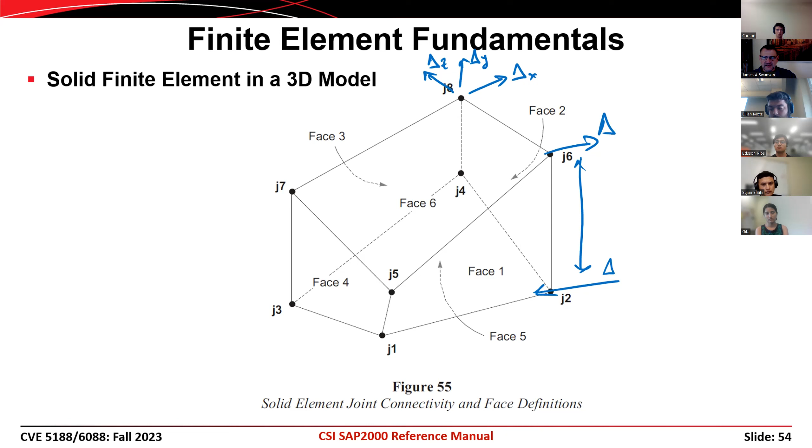All right, so that brings us to the end of the hour. I didn't get back to visual analysis at all, so we'll start there next time. At the end of the presentation that I posted for today are the steps for creating an FE model. Maybe before Tuesday, you could look through those tutorials. Maybe you want to start tinkering a little bit. If you just look at it and kind of get a feel for what to expect, that's probably enough.

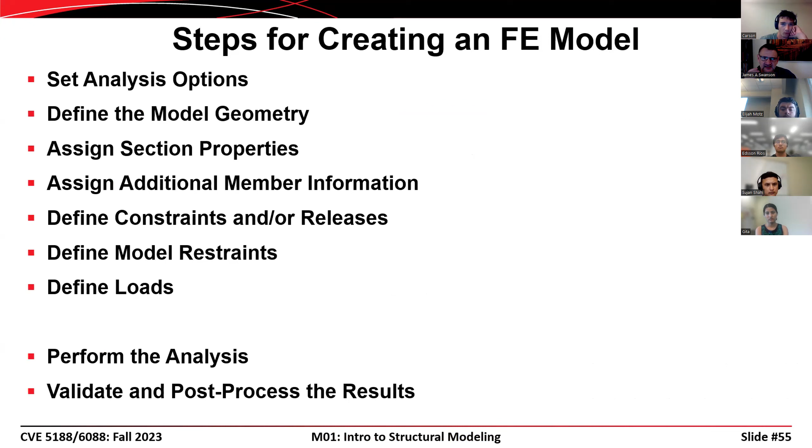And what you could do is go through here, and here's basically the steps we would have. So I'll start with this on Tuesday, and then we'll work through those tutorials and actually get some experience with visual analysis in SAP 2000.

Professor, I got a quick question here. I'm in the computer lab.